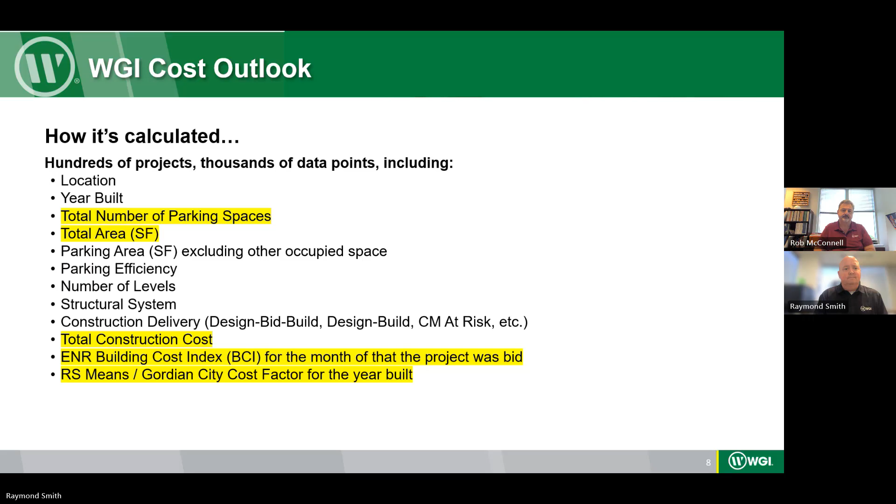And as I said earlier, it's very important to know what the ENR building cost index was at the time that project was bid in April of 2014, which was 5357. So we take that ENR building cost index back in 2014 and we create the escalation factor. To bring it to today's dollars, we take the current ENR building cost index value for May of 2025. That's when we published the article. At that time, the ENR's building cost index was 8520.44. And by taking that number divided by the original building cost index, we get that escalation factor.

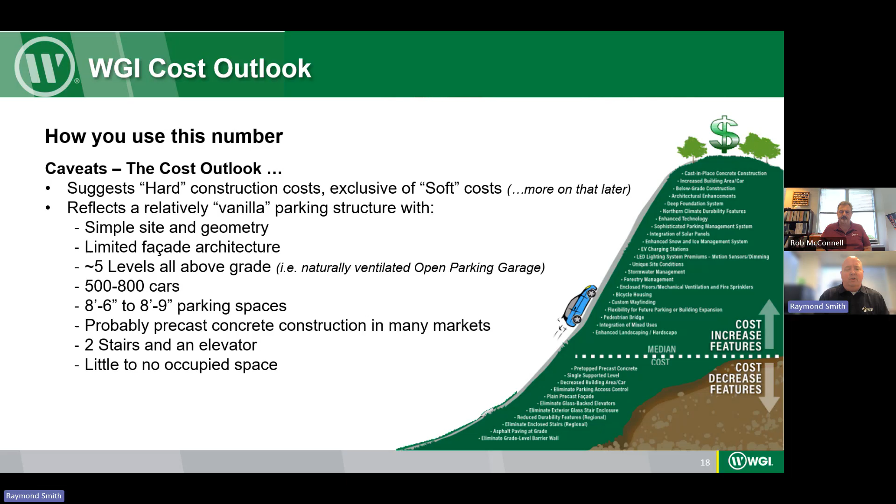Whether it's all above grade and naturally ventilated or not, there's a lot of things that can drive up the cost. It can be the facade on the exterior, or how much security and technology you're building into the parking garage. So there's a lot of factors that will sway this number up or down, and you've got to take those into play. Every time we do a really early stage estimate, we take our national average and then start escalating or de-escalating. If the garage is small, or has lots of things that complicate it, we'll create a premium for each of those items.

And just to give you an idea of what an average precast garage would look like, here are several photos of a precast garage with some decent architectural features. These are just some examples that I felt were in the average range. When you talk about, go ahead. I was going to say those are the ones that land right around our national median cost. So, yeah.

Same can be said with cast-in-place PT garages. Take a fairly decent size and a fairly basic exterior facade to land around the national median. As you start to alter the size or the exterior finishes, or what may be going on inside from a security technology standpoint, that starts to raise it above the national median.

So what makes up the construction cost of a garage? You say, well, we're giving you sort of composite numbers, but what goes into those numbers? What makes up the cost of building a garage? Well, a garage is a fairly basic building. It doesn't have a whole lot of finishes typically on the interior.

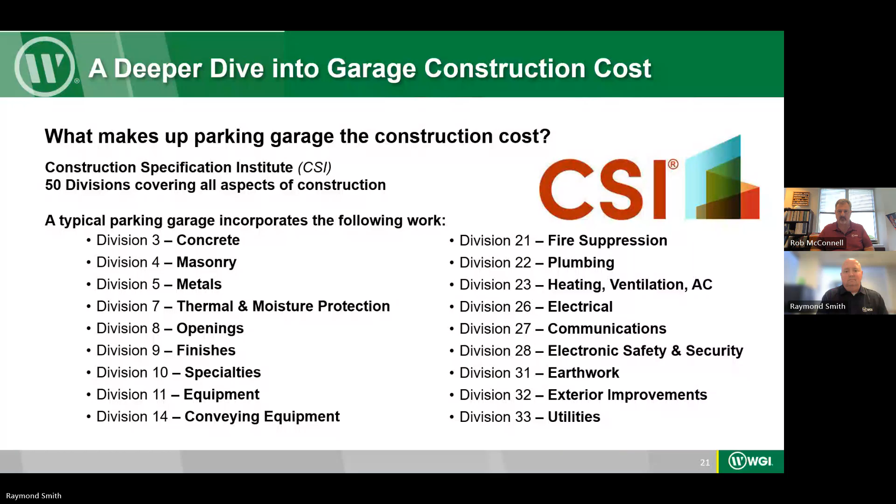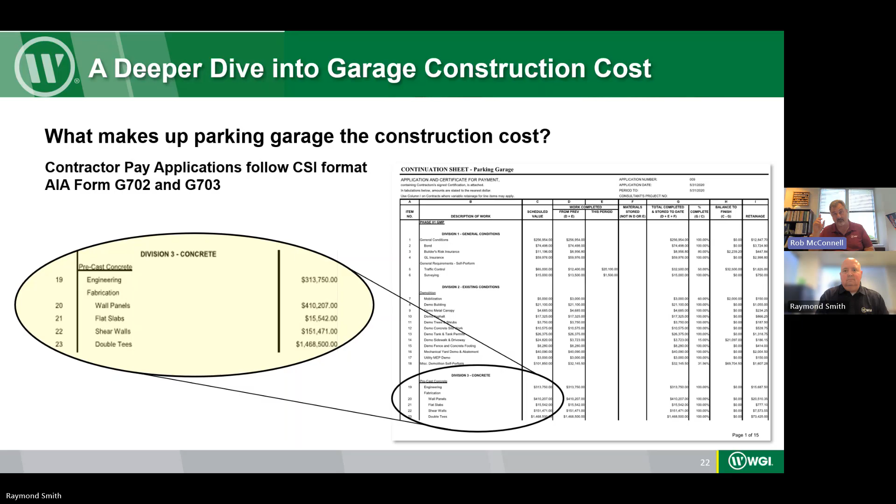Another reason why we use the CSI format is because it's the standardized method of presenting costs on pay applications, and most contractors, when they submit their AIA G702 and 703 backup, will have broken things down generally in accordance with the CSI format: Division 3 concrete, Division 4 masonry, Division 5 metals, etc.

So when we think about the individual pieces and parts, and the materials and the labor involved in those individual pieces and parts, the biggest component of a parking garage project in terms of cost is obviously the structure itself. Again, because there's very little in the way of finishes typically, the structural components, the concrete specifically, is probably going to make up 40 to 50% of the work, breaking down into the formwork, rebar, the ready mixed concrete,

maybe precast concrete, depending on what you're doing, post tensioning systems, and then you'll have a little bit of masonry typically, and a little bit of metal work, usually miscellaneous metals. Now, obviously there's exceptions to these rules. If you've got a really extensive hand laid brick facade on the garage, which we've done any number of times, that can add a fair amount to the cost, sometimes as much as 10 to 15%.

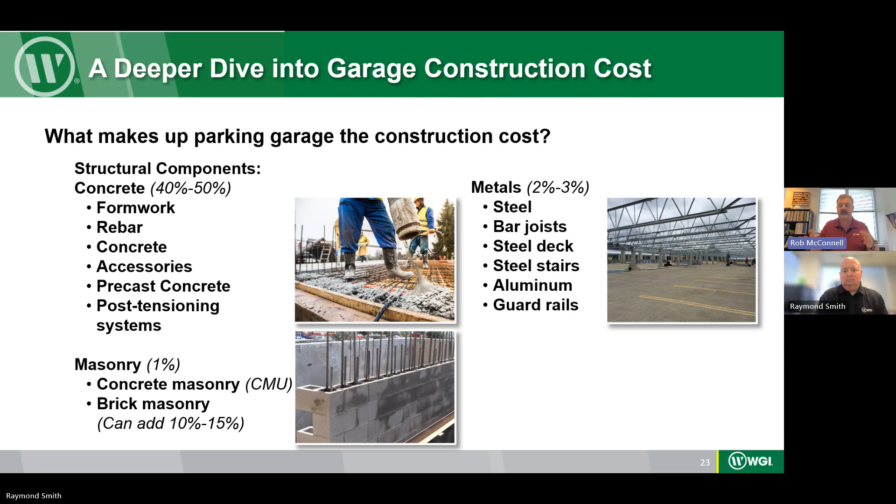And obviously if you've got the rare steel framed parking structure, or if you have a lot of ancillary steel structure that goes on the parking garage. For example, I've done a number of parking garages that have steel roofs on them, so that you can either get weather protection or add photovoltaic solar panels for on-site energy production. So that can bring up the cost too, but typically they're in the 2 to 3% range. We go to the next one.

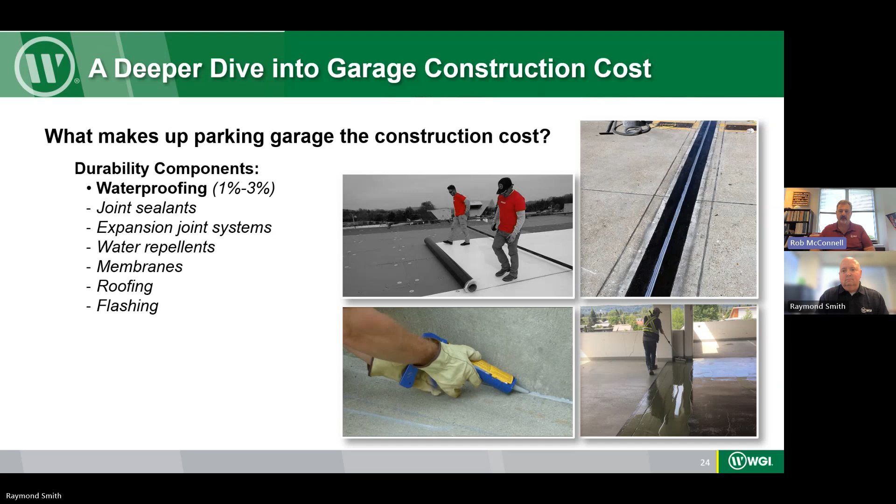The durability components. This is another relatively small part, but a very, very important part of the parking construction cost. Durability components include the waterproofing, joint sealants, expansion joints, membranes, coatings, roofing, and all that sort of stuff. Very important stuff.

Architecture. Typically we're looking at a little bit of curtain wall at the stairwells, in the elevator cores, maybe a little ground level storefront, probably a little storefront up at the interior side of the stair elevator lobbies on the top floor. A handful of man doors, maybe some overhead grills or rolling grills or rolling doors, depending on the security requirements of the facility. But it's usually a relatively small piece of the puzzle.

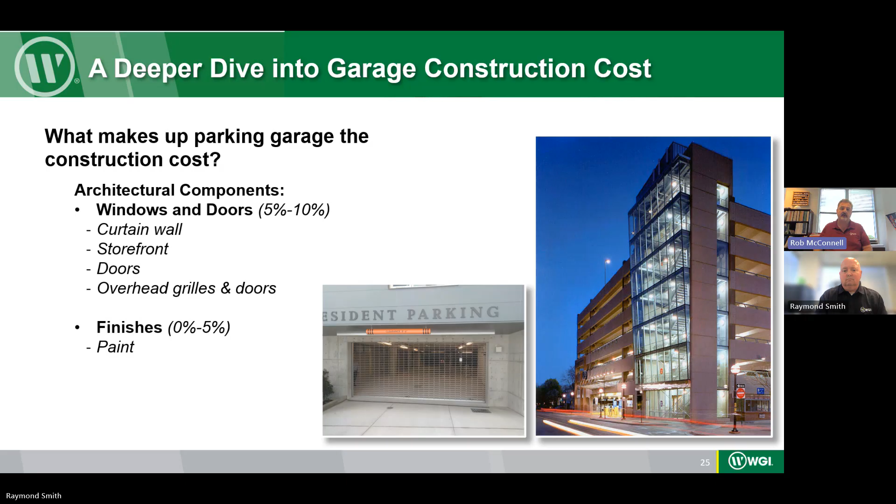And then finishes. And I'm talking primarily about interior finishes, painting those ceilings, painting the walls, or excuse me, I should say staining the ceilings, because you don't want to put a latex paint up there. The moisture will cause that to peel right off. But staining the ceilings or painting the columns and walls. A lot of garages opt not to do anything there, but it can be done, and it can really dress up the interior garage. But that can add up to 5% perhaps of the cost.

The parking technology or parking specialty components: signage is usually pretty inexpensive these days. One of those typical aluminum signs will run you somewhere in the $300 to $400 installed, depending on the complexity of the installation. Maybe one of the clearance bars at the exterior might run you, I don't know, $3,500, $4,000 installed. So in the grand scheme of things, it's not a whole lot.

Parking technology again, especially these days with the frictionless or gateless operations that are in place, the required investment in technology has really come down. In certain urban markets, it still makes a lot of sense to have gates and whatnot. But again, it's a small component of the overall cost.

And keep in mind, this is the cost to purchase it and install it. This is not the software, the annual cost to own it and operate it, which all of these pieces of parking technology have, subscription requirements and updates and stuff. And then elevators, depending on the complexity and the type of elevators, they can add a couple percent to the cost of the garage.

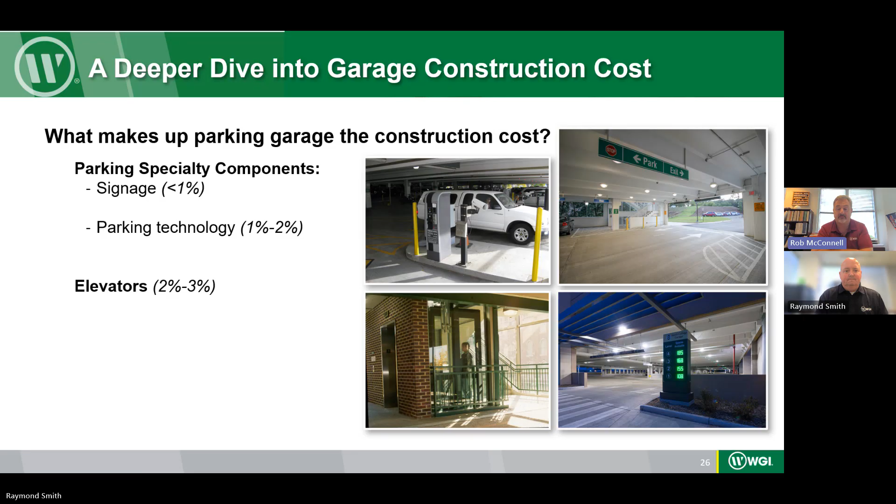Mechanical, plumbing, fire protection components, 3 to 5%. Again, a parking garage is a fairly simple type of building, but it does get a lot of exposure to moisture. So it's got to have a bunch of drains to pick up the floor drainage.

There are fire protection requirements. Historically, open parking garages only needed dry standpipes for fire protection. But with the latest couple iterations of the building code, fire sprinklers are now required in many parking garages, those over 48,000 square feet in footprint. And that can add a fair amount. That can add a couple percent just themselves to the cost of the facility.

HVAC, typically there's not a whole lot of HVAC in the garage. You probably have a handful of building support spaces that need to be conditioned, the electrical room, maybe a data closet, an elevator equipment room. But unless you've got occupied space, there's typically not much of an HVAC piece.

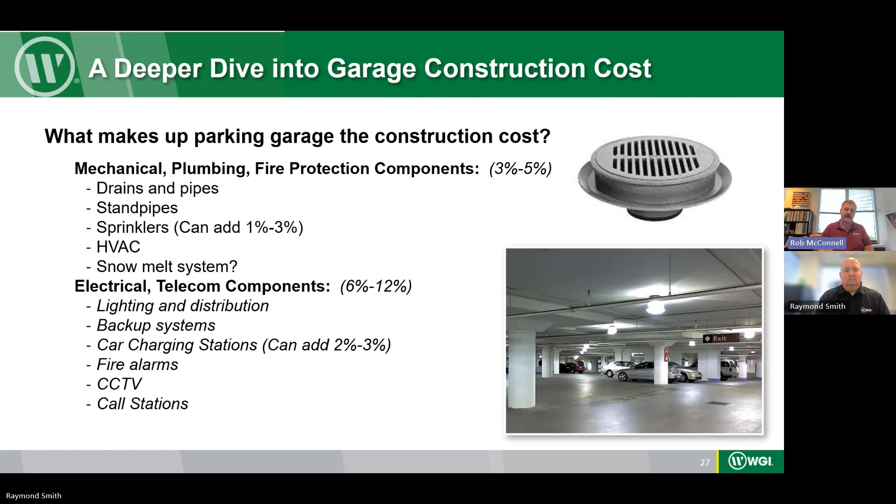But the electrical demands, each one of those car charging stations for a level 2 charger is a 40 or 50 amp circuit. That can get pretty expensive pretty quickly, especially since they're dedicated circuits for each piece of equipment typically. But like I said, that's a whole other conversation. And then the other low voltage systems are fairly typical and pretty limited.

The civil components. When we talk about the civil components, everybody says, well, you're a civil engineer. Yeah, but when we talk about civil engineering in the building construction industry, we're talking about the earthwork and the below grade foundations and the utilities and that sort of thing. And those have a nominal cost in that 5 to 10% range, depending on the complexity, depending on if you have to move utilities. I know we've gotten into a few jobs where we have to move fiber optic cables to get foundations in, and that can get a little expensive, but somewhere in the 5 to 10% range is appropriate.

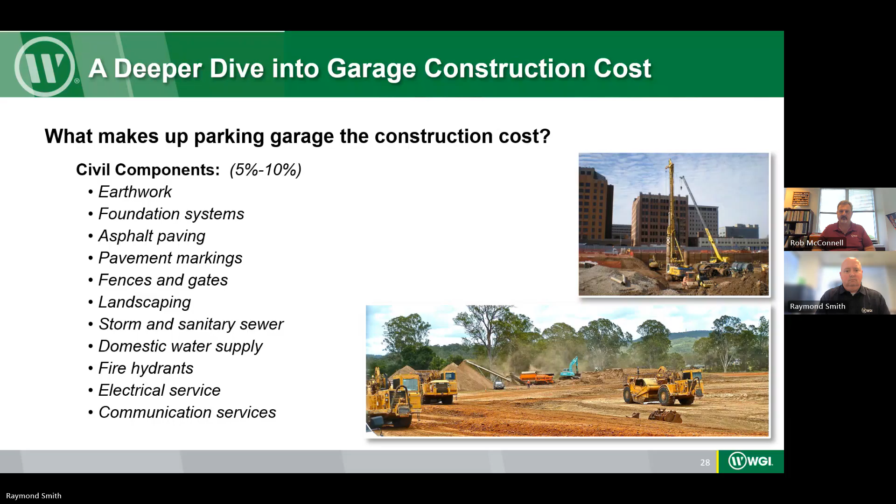Move the slide forward one, right there it is.

And then last, you've got basically your contractor markup, overhead profit, mobilization costs, general conditions. General conditions, that's your trailer and your porta-johns and the insurance, and every contractor, I think, buys a new pickup truck when they get a new job, so that goes in there, and then on top of that's whatever overhead and profit they've got budgeted in there. So those are the bits and pieces that make up the construction of a garage, with, as I mentioned earlier, the structural system, in particular the concrete, making up the bulk of that.

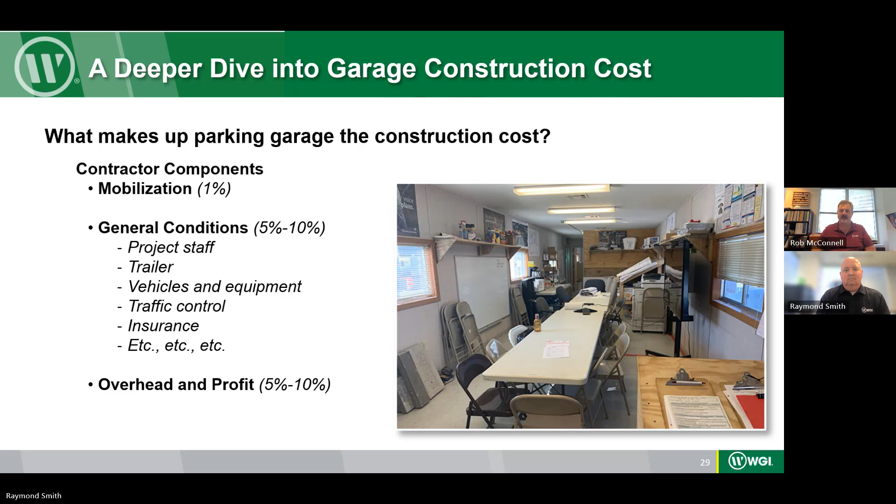All right, thanks, Rob. Well, that's a description of all the things that go into what we would call the hard cost of the construction of the parking structure. Now, if you're wanting to get a feel for the overall project cost, if you're getting ready to build a parking garage, we've been talking about the hard costs, and there's a lot of soft cost that needs to be added in that comprises the entire project budget. And the things that are part of the soft cost are like design fees. They're in that 4 to 8% range, depending on the size and complexity.

The smaller it is, the closer you'll get to the 8%. And the larger the garage gets and the less complex, you'll get closer to the 4% design fees. You've got material testing and special inspection that you need to account for. There will be real estate and financing costs that you may need to add in if you're purchasing the land.

You've obviously got insurances, fees, taxes, and then the owner itself may have their own management fee to oversee both the design and the construction of the garage. And then you've got to build in a little bit of contingency for unforeseen things that happen either during design or during construction. So there's an owner contingency percentage that you would want to add, and that's kind of the 3 to 10% range. You want to add to your project at least 3 to 10% to cover construction overruns.

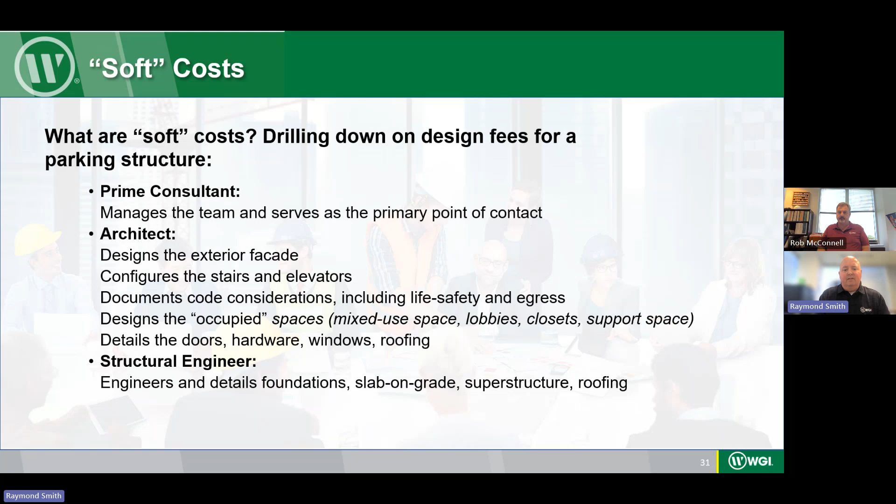You've got the parking designers like us. We're laying out the garage and we're creating the architectural parking drawing sheets, and that kind of defines the layout of the garage and how you circulate both vertically and horizontally throughout the garage. Our fees will also cover the wayfinding and signage. And as Rob mentioned earlier, depending on the amount of technology in your garage or access and revenue control that you want, or if you're doing parking guidance like in a large airport garage, that would be part of our scope of work.

And then as designers, being specialists in designing garages, we cover a lot of coordinating with the other trades and making sure that everything is well coordinated with all the structural elements and passes security. We also do drainage design and durability. I know Rob mentioned how important durability is in a parking garage, especially in the Midwest or northern climates. It's very important. And so as part of our parking design services, a lot of times we'll do the drainage and the durability design.

And that's making sure all the water that gets either brought in or blown in as rain, as it hits the floor, we're establishing how we're going to undulate the floor to get it to drain to the individual drains that we'll have located throughout the parking garage. We're also detailing all the waterproofing systems. That's sealers, sealants, expansion joints, that sort of thing.

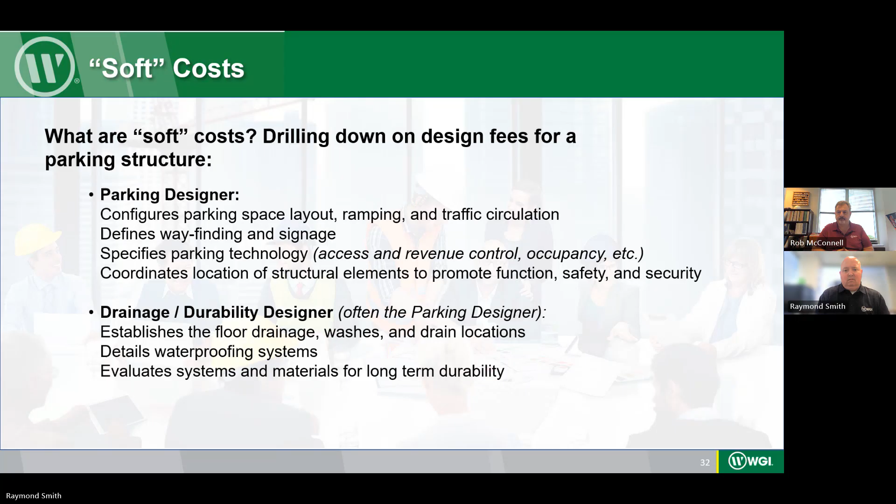You've got your MEP engineer, and his fees are covering designing all the electrical systems, lighting, communication, plumbing and HVAC and fire protection. Obviously, your civil engineer is doing all of the exterior conditions, all the site grading, drainage, stormwater, if you have stormwater management. He's connecting all of the utilities that the garage needs to the local utilities, be it in the street or nearby. He's doing all the pavements, curbs, sidewalks, and that sort of thing. And then you have your landscape designer who's doing all of the hardscape and planting that goes around your parking garage.

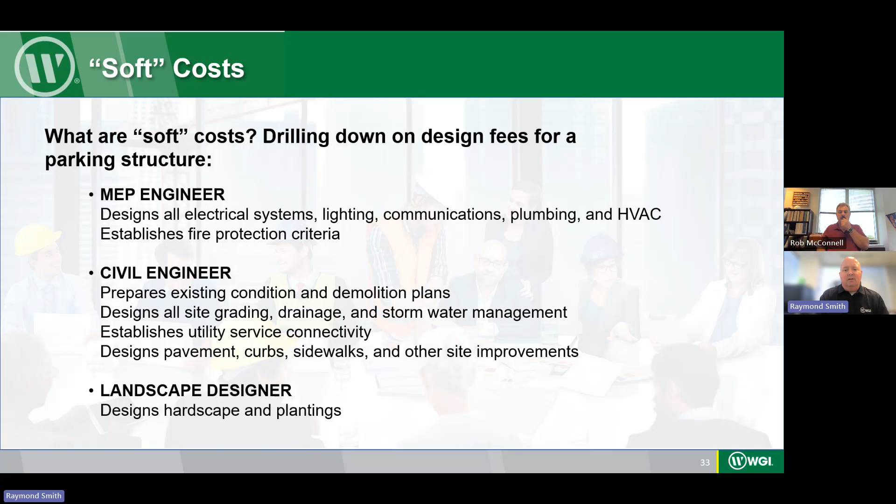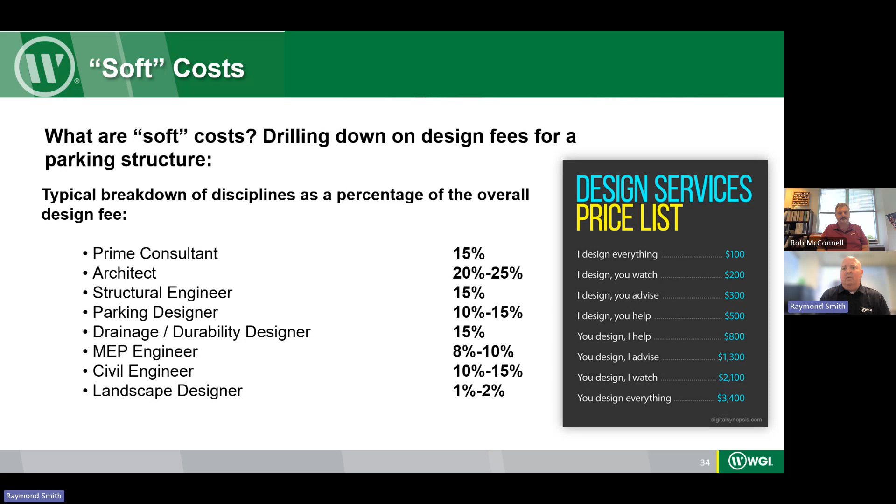All right. So let's say hypothetically you've budgeted the hard construction cost for your parking garage project, and you've estimated the soft cost. A lot of times we'll say somewhere in the 20 to 25% range is what you should budget for soft costs, for all those things that Ray mentioned. But one thing that people forget sometimes is that after you've built the garage, after it's up and running, it costs money to operate. And it costs a fair amount of money to operate.

Honestly, for a lot of operations, unless you're in one of the really, really big cities, where parking lease rates and hourly revenue can offset your debt service, most garages or mini garages in many communities, you're really looking at offsetting just the operating and maintenance costs. And particularly for municipal garages, where there may be a field of dreams sort of "if we build it, they'll come" approach, you're looking at offsetting your debt service through tax increment financing, sales taxes, or whatever.